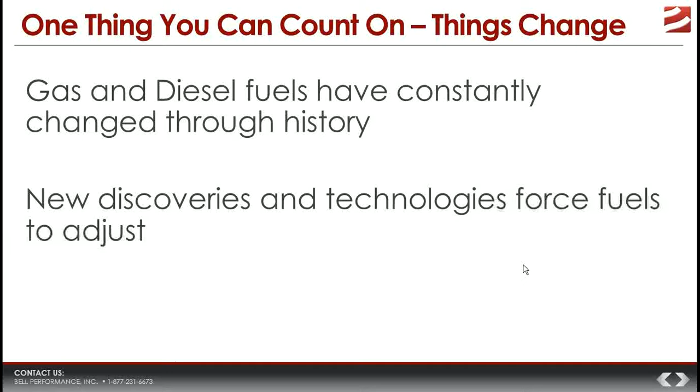Gas and diesel have changed markedly throughout the years, in response to the needs of the consumer and also the needs of the equipment that use those. Engines are completely different than they were in the late 19th, first half of the 20th century. Now you've got common rail diesel engines, gas engines with much higher compression ratios, and they've had to change the fuels in order to keep up with those and meet the needs of the consumers. So technology's changed, fuels have changed, the world itself has changed markedly, and that's one thing we're going to talk about in order to give some context into all of this.

Specifically, we're going to start by looking at the issue of energy in the world, the supply and the demand, and how that has changed from years past.

The biggest change, back probably about 10 years ago, there was a book written by Thomas Friedman called The World is Flat. It was a very interesting book, and the main thesis was that the world is changing markedly. People are a lot more connected, and the world's actually getting smaller because of the way we're able to connect with other people in ways we were never able to before. But one of the big things he talks about is the fact that the developing world is growing and consuming resources at a much faster rate than they used to.

An example of this is internet usage. Here in the United States and in Europe, we're used to thinking of the internet as our domain — we're the ones that use it, the third world doesn't tend to use it. That's what we think. But in the United States, we have about 270 million people that use the internet out of a population of 350 million. China has 650 million internet users. India has 352 million internet users — that's more people than in the entire United States. Yet we don't think of those developing countries as people who use that to any great extent, but they do.

Now look specifically at energy. We asked the question, who's using the energy? Well, in 2012, the International Energy Agency reported that for the first time in recorded history, oil consumption in developing countries actually surpassed developed countries. It was the first time in history that ever happened. If you go back to the year 2000, start of the 21st century, the developed world was using 70% of the energy. Now their demand has surpassed what the developed world is using.

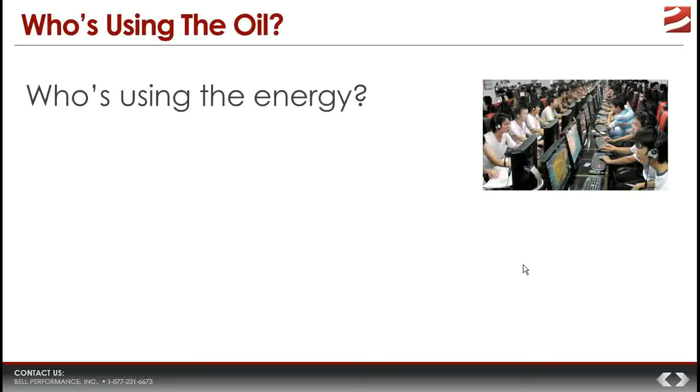The developing countries we're talking about are China and India, but also countries in Southeast Asia — countries that used to be considered third world, and by and large probably still are, but they have a growing population that is basically reaching out and trying to grab their share of the world's resources. And so when you have this demand that is growing and growing and growing, sometimes the ability to supply that demand struggles to keep up.

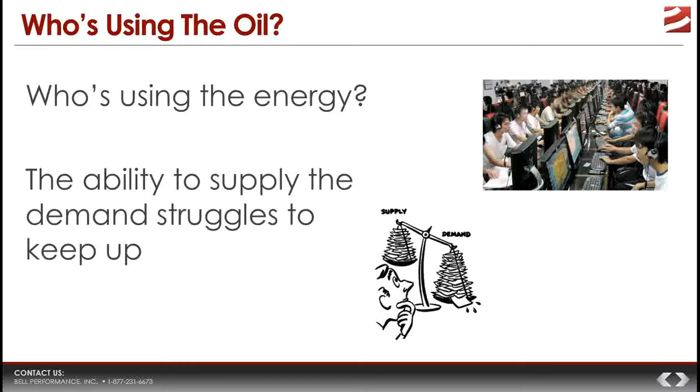And when we're talking about things like energy, crude oil, and fuel in that respect, what we're talking about is refining capacity — the ability to take crude oil and turn it into the things that people tend to use, gas and diesel. The refining capacity of the world has struggled to keep up with the demand.

Now, look at the United States. Go back to 1982, the United States had about 300 refineries that had the capacity to refine 17 million barrels of oil per day.

Fast forward about 30 years, 2013, the United States has 139 refineries, less than half, but they still have the same capacity, 17 million barrels a day. So you've got half the refineries refining the same amount of fuel, which means they're twice as efficient, but they're under twice as much pressure to keep producing, because if they stop, there's going to be problems. We've all seen what happens when a storm hits the southeast and knocks out a refinery in Louisiana. Gas prices shoot up because all of the refineries are working at a breakneck pace just to keep up with demand. So demand is something we're going to come back to later, because it's one of the drivers for this issue of how fuel has changed.

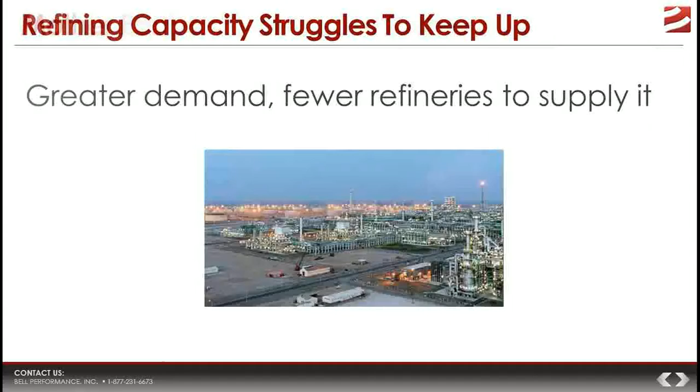Another key driver is the environmental movement. Whether you want to call it green consciousness, or being a friend of Mother Earth, whatever you want to call it, there's more and more people now concerned about the environment than ever before. And when the populace is concerned, Congress and the government tend to get involved. They are more likely to take action if the people are more concerned about it. So increased green consciousness has led to more congressional action, and that congressional action is what has impacted the fuels we use today.

One of the things we're going to mention again later is the Clean Air Act of 1990/1992. That is a key event that changed the fuels we use and caused some of the changes we're going to talk about, and what has brought us to our current situation.

So what we're going to do now is talk about some of the big changes that have happened in the fuels. We're going to talk about why those happened, and how those specifically changed things in the fuel that have caused specific problems you might be seeing now. So we're going to do a lot of contrast between looking at what fuels used to look like 20, 30, 40 years ago and what they look like now.

First thing we talk about is this thing called cracked fuels, or fuels made with cracked feedstocks. The first big change is that the storage life of fuel is completely different now than what it used to be. Back 20, 30, 40 years ago, the storage life of fuel was much longer.

There was a study commissioned by the U.S. Army in the 1960s. They wanted to study fuel storage life, and what they found is very interesting. They found that the expected storage life of regular gasoline should be 2 to 5 years without any problems. Expected storage life of regular on-road diesel fuel should be up to 10 years or more. That's what they found in the 1960s. So the old storage life was 2 to 5 years or more.

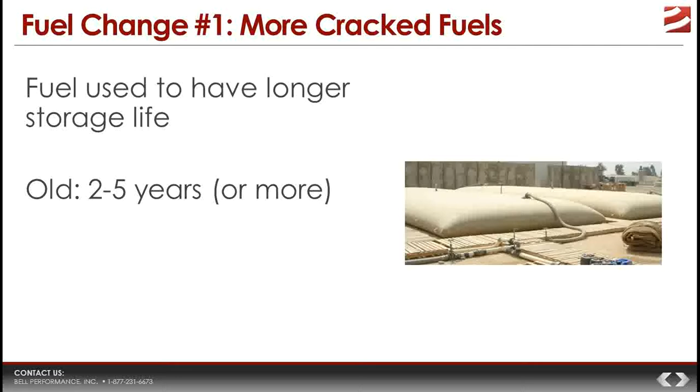What is the storage life like now? Well, not even close to what it used to be 20, 30 years ago. Now, storage life of gasoline, if it has any ethanol content, which virtually all on-road gasoline does, expected shelf life is 90 days. For diesel fuel, number 2 on-road diesel, you put it into storage for 1 year, and you can expect the storage quality to degrade about 25%. That can be anywhere up to 70, 80, 90% if you've got things like water or microbes in that fuel. So the big difference is storage life of fuel is way down compared to what it used to be.

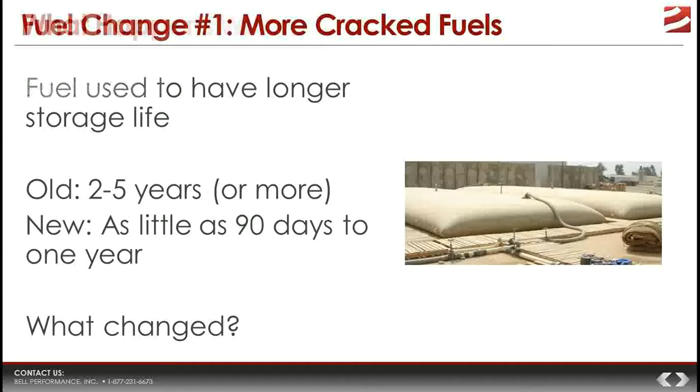What changed? That's the question. Why, what changed about it? Well, in order to answer that question, we have to cycle back to the supply and demand issue. Demand is at an all-time high. The ability to fill that demand has been struggling to keep up, and so you've got greater and greater pressure for the refining industry to get more gas and more diesel out of crude oil.

You can see this illustration here. A barrel of crude oil, which is 42 gallons, they tend to get a certain amount of the main components out of it. You see they take gas, they take diesel, jet fuel, they have heavy fuel oil, which is the residuals, the natural gas, and then the asphaltenes and the tars that are left over.

Now, what they want to do is, in order to meet this demand, they want to get as much gas and as much diesel out of that crude as possible. But there are limitations to what they're able to do. Right now, they're up to about 29 gallons out of every 42 gallons of crude oil becoming gasoline and diesel fuel. They would like it to be more than that.

And so what they have been able to do out of necessity, really, is petroleum chemists have developed what they call hydrocracking processes that they can use at the refinery to get even more gas and even more diesel out of that crude oil. Now, in order to understand this better, you have to understand basically what we're talking about when we talk about cracking. What is it all about and what do we mean by it?

Well, consider that crude oil, when it comes out of the ground, it's a natural blend of a variety of large and small size molecules. And those molecules are typically defined by the number of carbons that they have in them. Different sized molecules tend to be associated with different components. Gas and diesel fuels are made up of molecules that are between 8 and 21 carbons long.

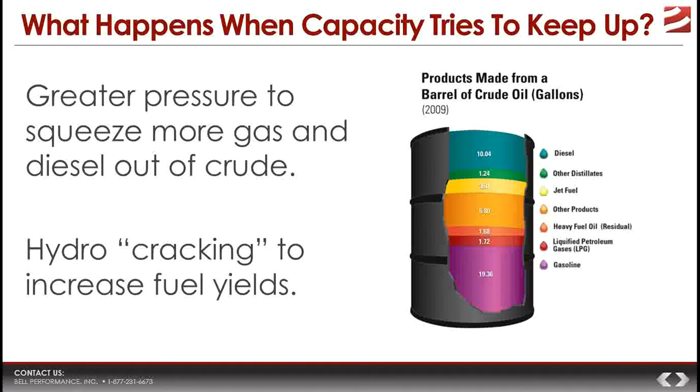And that's great. You know, that solves the problem to a certain extent, but it doesn't mean that there aren't consequences that happen when you do this. And the main consequence is that if you have a fuel that has a certain amount of what they call cracked feedstock, because they will blend that in, they'll use that as a filler. The more cracked feedstock a fuel has in it, the more likely it is to react and to degrade and to lose stability over a given period of time.

And the reason why is because when you take a long molecule, like in this illustration, and you break it apart into two smaller molecules, what you tend to get is those smaller molecules tend to have double bonds in them. They're what they call alkenes, if you're a chemist. And double bonds tend to be more reactive. They're less stable and they're more reactive than single bonds are.

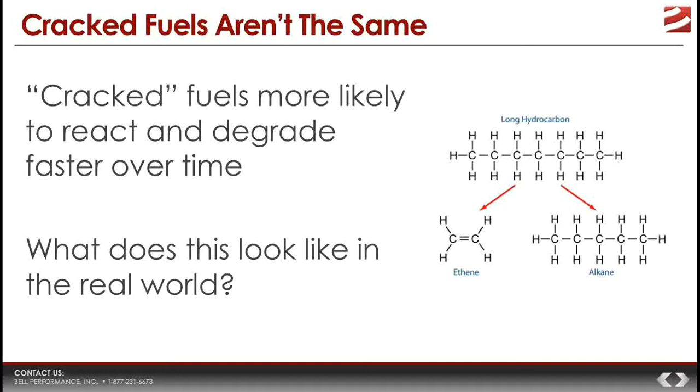What that means in practice is that those cracked molecules, now in the fuel, are going to go around, they're going to try to react with other molecules, and they're going to start catalyzing reactions in that fuel that are going to eventually cause it to become unstable and break apart at a faster rate than if they weren't there. So the consequences of this for where you're at in the real world is, as we said, poor storage life.

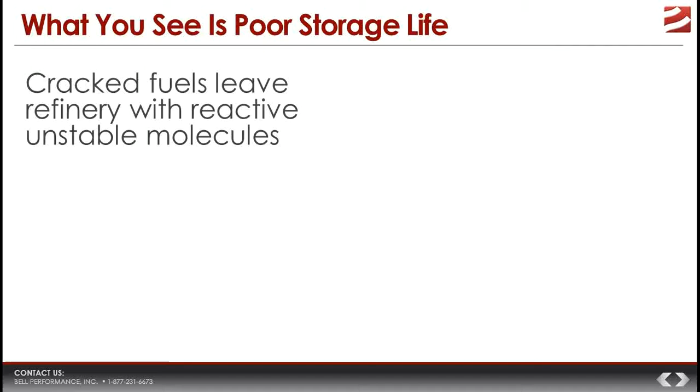Cracked fuels leave the refinery with greater numbers of unstable molecules, and these molecules are reacting, and when they react, they don't just react without consequences. What happens is that they tend to join and form longer and longer and bigger molecules as they react. And so what you start getting is formation of longer and longer polymers in the fuel, and eventually, given enough time, these molecules become big enough that they are too big to stay dissolved in the fuel. They start to drop out of solution.

And when that happens, you get color change in the fuel. The fuel starts to darken. Things like sludge and varnish and gums start to form, and those are the things that are going to be causing some of the problems that we're going to talk about.

What does this look like in the field? What that question means is, if you are a fuel user, where you're at, what problems is this going to cause for you where you're at? Well, to a certain extent, the problems are universal, but how you use the fuel, basically whether you are a fleet user for transportation or whether you use it in emergency backup generation, that is going to influence the problems that are going to most impact you where you're at.

So what does this look like in the field? Cracked fuel instability. Well, if you are a fleet operator or a driver, what you're going to get is the fuel's not going to burn as completely or as well as it would if it was fresh, and that's going to lower the MPGs you're going to get out of it. It's not going to burn as completely, which means more soot and more smoke production. You're going to get injector deposits, and you're also going to get shortened life and shorter service intervals for your DPF, your diesel particulate filter system.

All of these happen because the unstable fuel, because of the cracked molecules in it, is breaking apart. It's not burning cleanly. It's not burning completely in the engine. You're not getting the full energy value out of it. You're getting all of these problems. The big one to be concerned about if you're a fleet or a driver is the injector deposit issue.

Injector deposits happen because you're running fuel through them that already has sludge or gum or heavy polymer components dropping out of it. Those collect in the injector. They cook, they react with the heat and pressure already inherent in an injector tip, and you get deposits formed in that injector tip. The problem that causes for trucks is it affects the way the fuel atomizes. You don't get the best, most efficient functioning of that fuel injection system, and injector deposits are the single biggest influencer for mileage for any fuel-injected vehicle, apart from driver behavior.

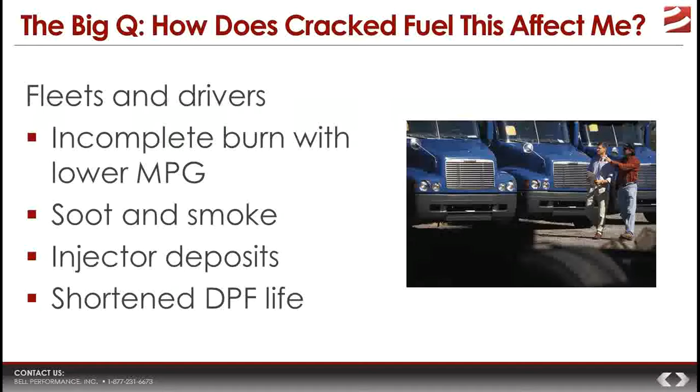So those are the ways that cracked fuel affects fleets and drivers. On the other side of the coin, you've got people who basically store the fuel and use it for generators and for emergencies. Those people are going to have similar problems, again, because it's reacting in the same way for them as it is for the fleet and the truck driver.

They're going to get sludge formation in the tank because that fuel is sitting there. All those heavy polymers forming, until that fuel is used, are just going to sit there. It's going to drop out and collect in the bottom of the tank. The reason this is a problem is because those molecules used to be part of the fuel, dissolved and soluble in it. Now they're not, and that means part of the energy value they would have contributed is not being contributed anymore. So the amount of work it can do, what we'd call MPGs, is not going to be as much as before. The system is not going to be as efficient because it's lost energy value.

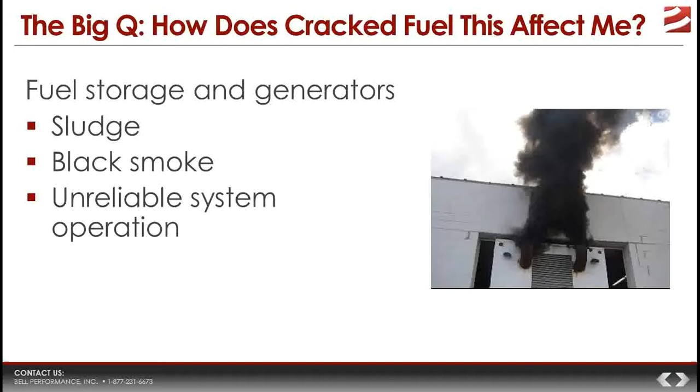Unreliable system operation is a big one for emergency systems, standby generators, and critical use systems. They store fuel in order for it to do a job, but if the fuel is unreliable and unstable, it's not going to burn as well, and that means a greater chance of that system not running like you need it to when you need it to.

So the bottom line for all this talk about cracked fuels: greater demand means more pressure on getting more gas and diesel out of a finite amount of oil, and that means the fuels being produced burn dirtier, burn less completely, and do not store anywhere near as well as they used to. That's the first big change: greater use of cracked fuel or cracked feedstocks in gas and diesel.

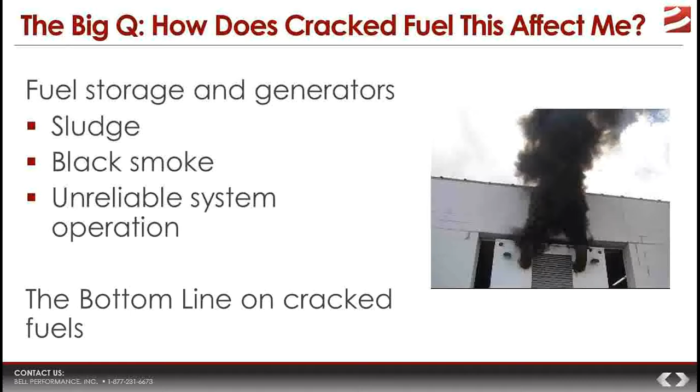The second big one is something everyone is probably familiar with by now: ultra-low sulfur diesel, or the marked reduction in sulfur content that diesel fuel today has compared to 15-20 years ago. Sulfur is a natural component of oil because crude oil is a natural product. So when you refine that oil, the sulfur ends up in the different components you take out of it. All fuels, except for really light ones like natural gas, all the distillate and residual fuels have some kind of sulfur content in them.

For most of the 20th century, regular on-road number 2 diesel had a sulfur content of 5,000 parts per million. But around 1990, Congress decided it was time to look at laws addressing environmental concerns: depletion of the ozone layer, toxic urban air pollution and smog, and acid rain was a big one, with pictures of forests full of dead trees. The public wanted something done about that. So Congress said sulfur emissions from things like diesel fuel are the primary driver of acid rain, and cut the amount of sulfur allowed in diesel fuel. This was done at the refinery level.

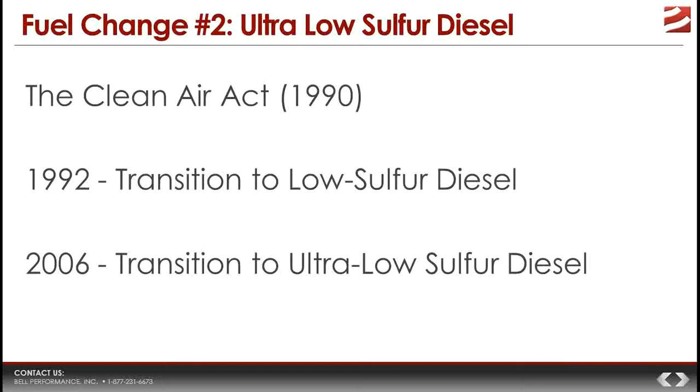Now, what effect did this have on the fuel itself? There are about 5 main effects we're going to talk about. The first is the effect on fuel lubrication, the lubricity value of the fuel. Generally, sulfur content in fuel has been associated with the ability of that fuel to lubricate things like injectors and fuel pumps. Injectors and fuel pumps have relied on the fuel's lubricity value to lubricate them and keep them from wearing out prematurely. Now, when you remove sulfur, you lower the fuel's ability to do this.

This increases wear on these parts—fuel injectors and fuel pumps—specifically causing premature wear on parts and shortened part life. And of course, it stands to reason that you're going to get higher maintenance costs as part of that.

First problem, reduced fuel lubrication because they took the sulfur out. Consequence of that: increased maintenance costs and wearing out of injectors, things like that.

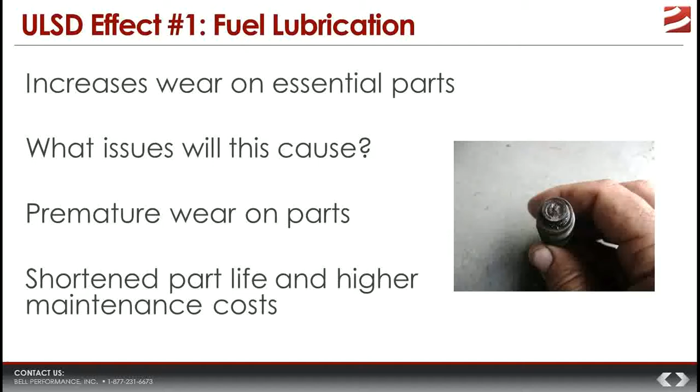Second main problem is lower energy content. When they process the fuel, they not only remove the sulfur, but they also remove other things like aromatics, which are a type of molecule that make up a significant portion of the diesel fuel. Removing those changes the energy value of the fuel, lowers it, about a 1% reduction. Anytime you have a lower energy value, that lowers the MPGs for the consumer, for the user, and it basically makes it more expensive.

So how much more expensive? A 1% reduction in energy value doesn't sound like a whole lot. When they were running the numbers, they were estimating that for every 100,000 miles you drive, your costs are going to go up about $500. Now for the average consumer with a diesel pickup truck, that's pocket change, they can find that change in their sofa. But for a fleet with hundreds of vehicles running on diesel, that cost adds up, and that's an extra cost that could be used in another area. So it's significant for them.

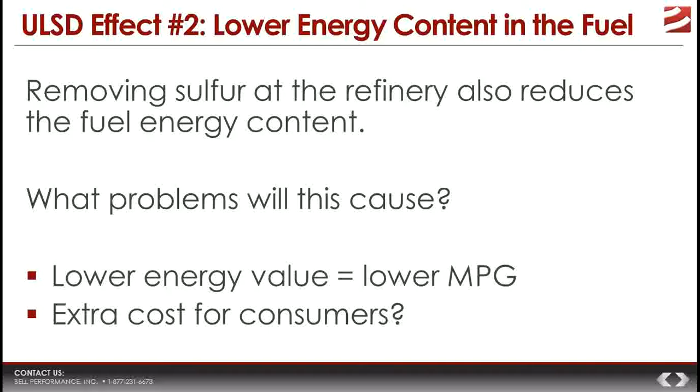Also, a factor that plays into the cost of ultra-low sulfur is that it's more expensive to produce. They estimated it was going to add between 5 and 25 cents per gallon to that diesel fuel. So you're getting a little bit less mileage, but it's also a built-in cost on the front end that is costing users more. So the second effect of ultra-low sulfur diesel: it's more expensive, basically.

Third effect: contamination, or possible contamination, with high sulfur diesel fuel.

If you think about it, think about all the storage tanks around the country. A lot of those storage tanks are older ones that used to have high sulfur and low sulfur diesel in them. When they started transitioning over to ultra-low sulfur diesel, some of those might have been drained and filled with ultra-low sulfur diesel. If you were to go and test all of those tanks, what you would likely find is that a significant number of them have sulfur content that is too high, out of compliance. And the reason for this is that it does not take very much leftover high sulfur fuel in the bottom of that tank to bring the whole mix out of compliance.

To a certain extent it's a mathematical issue. Let's say you have a 1,000-gallon tank that used to be filled with low sulfur diesel, 500 parts per million. They wanted to switch it over to ultra-low sulfur, so they drained it. But let's say it had some sludge left in the bottom, and they drained it down, but might have left some of that sludge in there. Then they filled it up with ultra-low sulfur diesel. Sludge tends to act a little bit like a sponge, so there were trace residuals of this higher sulfur diesel fuel left in there. In a 1,000-gallon tank, all you need is 15, 20 gallons of leftover trace high-sulfur diesel to throw the whole thing out of compliance.

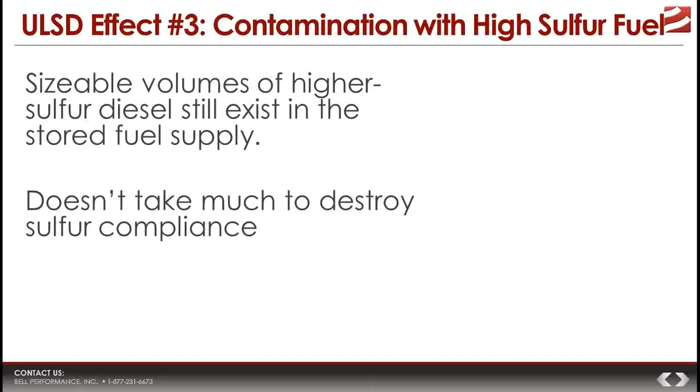So there's a lot of tanks out there that are out of compliance. Now, in and of itself, who cares? Why are we even talking about this? To a certain extent, contamination with high sulfur diesel is not a performance issue. It's not going to destroy equipment by and large. It's not going to cause engine problems.

What this becomes is a compliance issue and a legal issue, because when they switched over to ultra-low sulfur diesel, the EPA, which tends to enforce this, announced penalties. If you were a truck driver and had your fuel tested and it was found to be out of compliance, you were faced with penalties of $32,500 per tank per day. And they would backdate that, assuming you had been using this fuel for 21 days, 28 days. Naturally, when you're looking at six-figure fines potentially, the industry said, whoa, that's a problem.

The EPA worked with them and allowed a slower implementation of the ultra-low sulfur diesel, but that implementation period, designed to try and get this higher sulfur fuel out of the system, is over with. So this effect of possible contamination with high sulfur diesel is a legal liability issue that people who manage fuel have to be concerned with.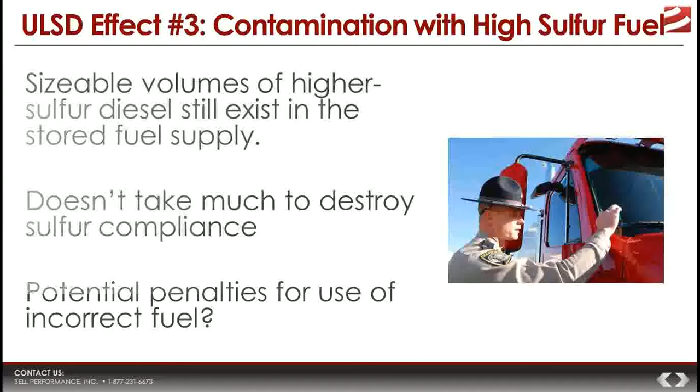Fourth effect: cold flow properties. Bell Performance is located in Florida, so we don't tend to have cold flow problems down here, but we deal with a lot of customers and fleets up north. If you're up north in Michigan, Illinois, New York, anywhere above the Mason-Dixon line, you know diesel fuel has cold flow issues in the winter.

Diesel fuel naturally contains paraffin wax components. Those are normally dissolved and burned seamlessly as part of the fuel, but when the fuel starts cooling down, some of those start to drop out of solution. They form crystals in the fuel, those crystals bump into each other and get bigger. Over time, as the fuel continues to cool, more and more wax comes out, and eventually the fuel thickens. You get enough wax that it plugs the filter, and when the fuel filter is plugged, the engine shuts down because there's no fuel flow anymore.

Now, ultra-low sulfur diesel has issues with this because of the processing. When they removed sulfur, they also removed and destroyed some compounds, like the aromatic compounds that in the old fuel would act as dispersants, keeping wax crystals apart if they came out of solution. Now those compounds aren't in there anymore, so there's nothing to keep the fuel from gelling at a higher temperature, and that's exactly what happens.

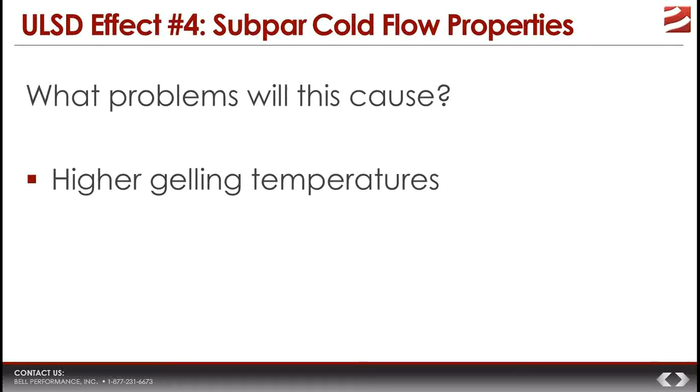So what problems does this cause? The fuel gels at a higher temperature, which means you have more gelling problems in a given winter period. So you get increased filter blocking and operability issues, and if you're a business running trucks out there, any potential for operability issues means potential for lost business and big-time headaches. The big difference between how ultra-low sulfur diesel behaves in the field versus the old fuels is that it's much more sensitive to cold weather problems.

The fifth and last effect we'll talk about is lack of resistance to microbes. This is probably the biggest one, with the potential to affect the most people in the most serious way. Regardless of whatever kind of fuel you're putting in a storage tank, microbial presence in those storage tanks is a universal problem faced by everyone who has a fuel tank. That's because microbes are ubiquitous in the environment around us. We already know that—they get into the tank by any number of ways.

It's not like somebody's taking a petri dish and dumping the contents into a tank. All that needs to happen is dust comes in—you can have hundreds of millions of microbes on a single particle of dust. Water gets in, whether by a tank leak or just water vapor in the air. If you get a fuel drop, somebody drops some fuel, they've got microbes in their tank, and it spreads very easily from tank to tank.

So they get into the tank, and what they're looking for is some kind of water layer. Anytime you have water in the tank, you have a layer of water on the bottom and fuel on top, and those microbes are going to settle into the interface where the two layers meet. They draw what they need from both sides, and they grow, thrive, multiply, and produce biomass and all sorts of stuff that causes problems.

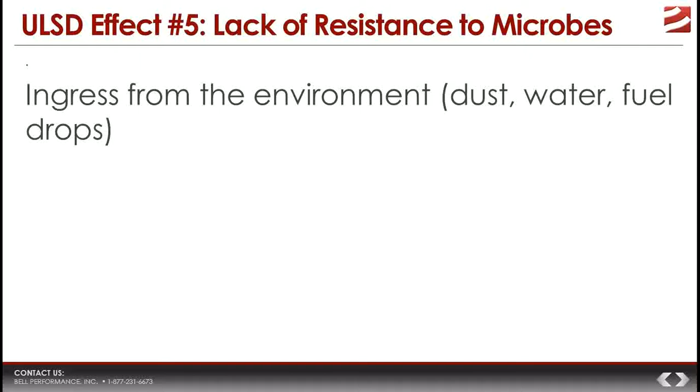We mention water because anyone that has a free water layer in their fuel storage tank has the very real possibility of having a microbial growth problem. It is not a matter of if, it is a matter of when—seriously, for those types of situations, it's not a matter of if, it's a matter of when.

But most people don't seek to have a water layer. So how does water build up in a tank? Well, it can happen just by natural processes—even something as simple as condensation.

Fuel gets a 7-degree temperature difference between daytime, and then when it cools down at night, temperature drops. Any water vapor that's in the tank from air that has exchanged through airflow is going to condense on the sides of the tank. It's going to roll down to the bottom because water is heavier than fuel, and there's going to build up a water layer over time. This is probably elementary stuff to those of you who have dealt with tanks in any significant capacity. That's just the way it is.

But even beyond condensation, you could have someone transfer water during a fuel drop. If you've seen gas stations with underground tanks, they have openings and spill buckets designed to catch water, and those can hold two, three, four, five gallons of water. Somebody goes to do a fuel drop and isn't paying attention, and some of that water goes into the tank. There are enough ways for water to get into tanks that it's virtually inevitable that a storage tank is going to build up water.

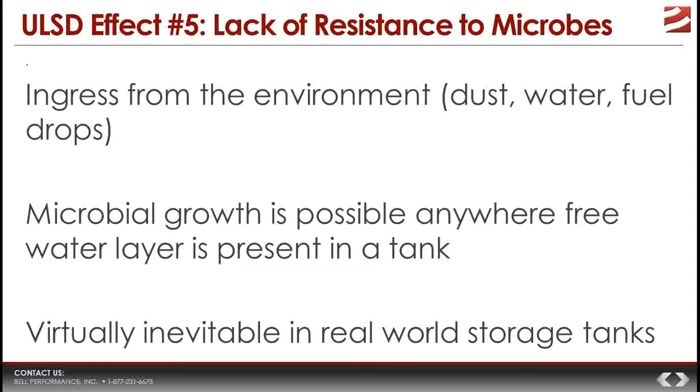So microbial problems are a potentially big issue. What problems do they cause? Now this is kind of the so-what part. What problems do they cause?

Well, the first thing is that fuel microbes are associated with filter plugging, and they're very easy to spread to other areas. They produce biomass and slime because of the natural processes and byproducts of their activity. That biomass clings to the sides of the tank and gets into the filters, plugging them. That's why if you manage any amount of tanks, you tend to know how often you have to change those tank filters. When you notice that frequency shortening or changing suddenly, that is a surefire sign that something's going on in that tank that you need to check out.

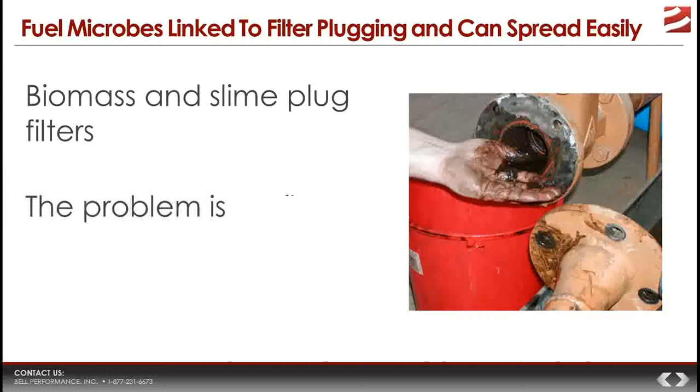And just like infections in the human body, infections in fuel tanks can be very easily spread anywhere that fuel goes. I mean, it's just the way it is.

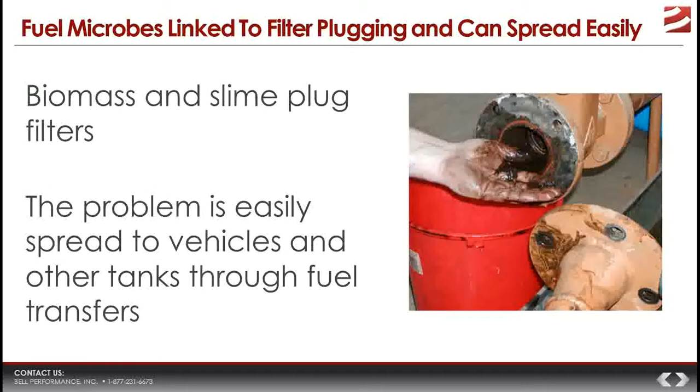Second problem is that microbes tend to destroy fuel stability, and if you add microbes to fuels that have cracked stocks, you get a double effect. Microbes, when they grow, produce acids and biological byproducts, and those will attack the fuel and break down the fuel quality.

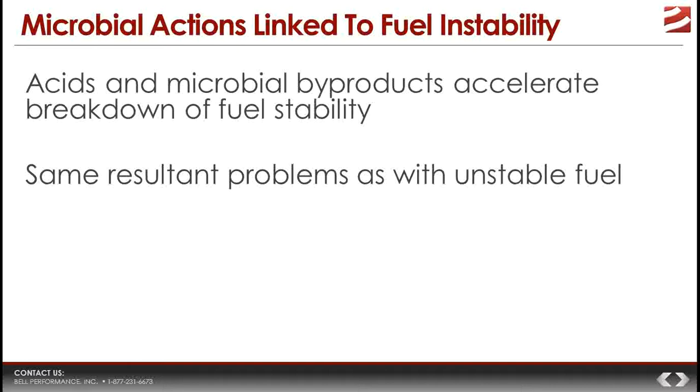What problems does this cause? Well, you get the exact same problems as we talked about with fuel instability: deposits in the engine, black smoke and emissions, rough, inefficient engine operation. All of the problems associated with unstable fuel are going to be associated here as well.

Consider places that store fuel for emergency use, like hospitals, telecommunications businesses, public utilities—places that have to keep going and cannot have their systems shut down. So they have backup systems with stored fuel.

Now, the nature of stored fuel, or emergency use fuel, is that those tend not to be checked very often. The fuel is there because they might need it at some point, but they don't know when they're going to need it. They just know that when they need it, it has to do what they needed it to do. It absolutely must. So there's a very, very high value placed on that stored fuel performing properly when it's called on to do so.

Now, as we have implied, the nature of emergency means they don't know when that fuel is going to be needed. And so because of human nature, unless there is a rule in place that says you must check your tank every month, test the fuel, do whatever, X number of times within a year—unless there's something directing people specifically to do it, people tend to leave that alone because it's out of sight, out of mind. And so what you get is problems that arise when emergencies happen and the fuel in that tank hasn't been checked. You get a higher chance of what we'll call critical system failures.

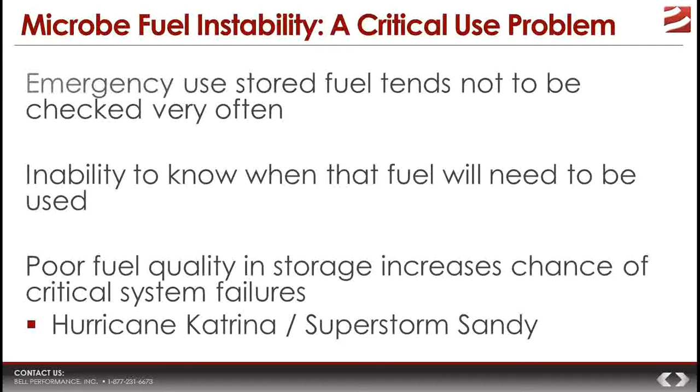And the biggest culprit in those situations is microbial buildup in those storage tanks. Now, microbes cause instability, they cause filter plugging. What they also cause is what they call microbe-related corrosion. Within the industry, it's abbreviated as MIC, microbially induced corrosion. We mentioned earlier that microbes, as a natural part of their biological processes, produce acidic compounds. And those acidic compounds do exactly what you think they do - they attack storage tank surfaces, and start to corrode surfaces and components inside of that tank.

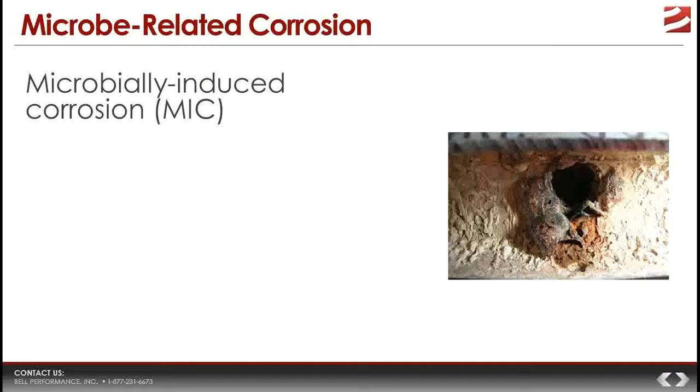There are cases where some types of bacteria have been known to eat through a 5 millimeter thickness of 316 grade steel in 1 to 2 months. Now that is an extreme case, but it is a documented case. And it basically serves to illustrate the kind of serious damage that these microbes can cause.

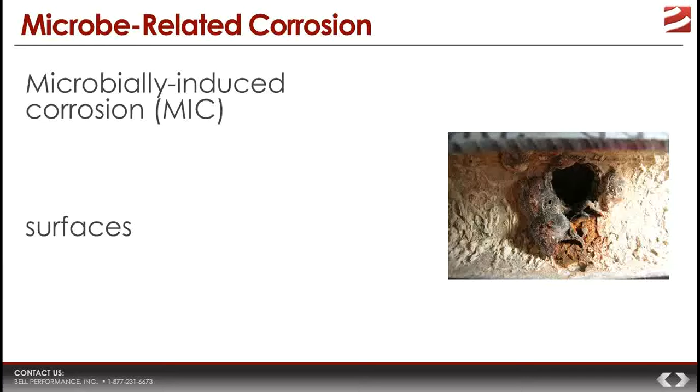And this kind of damage is expensive. Anyone who deals with tanks knows that even if you have to replace parts inside of them, it's at least hundreds, if not thousands of dollars. And it's not something that is a budgeted, expected expense either.

Now, how did the changes to ultra-low sulfur diesel lead to microbe problems? Okay, well there are two inherent qualities of ultra-low sulfur diesel that have caused it to be more susceptible to these issues. The first one is that it is more what we call hygroscopic, meaning that it attracts water.

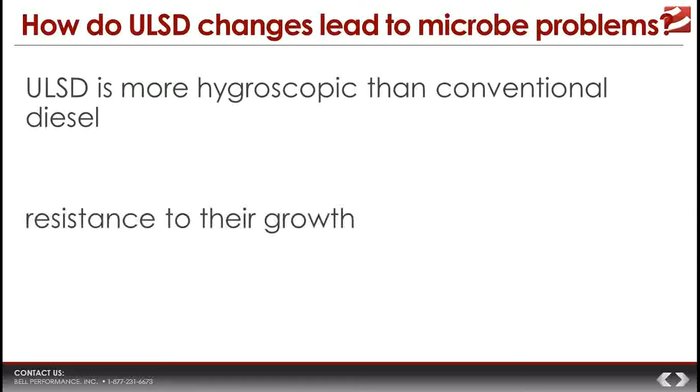Sulfur was a natural biocide that tended to inhibit microbial growth. Microbes do not like being around high sulfur content. That is why, when you had high sulfur and low sulfur diesel fuel, the conventional wisdom was that as long as you kept the water under control, you would not have to worry about microbial growth in those fuels. Now you take the sulfur out, and there is virtually nothing in that fuel that's going to keep these microbes from growing and thriving in them. And so that is why, if you have ultra-low sulfur diesel in a stored fuel tank, microbial problems have the potential to be a huge problem.

Okay, now let's cycle back for a moment to those old storage tanks, the ones that have had fuel in them for years and years. Go back to the last time we had a major hurricane, a really active hurricane season - that was around 2003, 2004, 2005. When hurricanes are coming, checking the backup fuel in the tanks tends to become more urgent than when imminent danger is not imminent. So a lot of those tanks had fuel added to them back then.

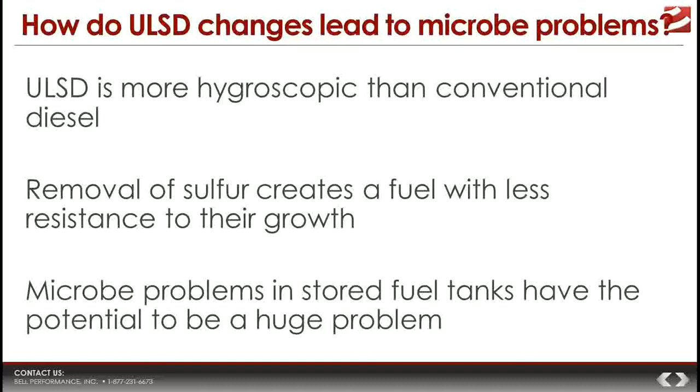So what we want to do in this last part of the webinar—we spent a lot of time talking about the problems and why, all the little details about what led up to those issues and the problems they cause. So what we want to wrap up with is action: what do you do about these? These are the kinds of solutions the industry has figured out for these problems. We'll spend a few minutes going over these briefly, then take some questions at the end and wrap up.

So first problem, remember we talked about fuel instability. The problem was heavy fuel components, deposits and sludge in storage tanks and in engines. The cause being refinery cracking methods, and also the action of microbes in the fuel. Anybody who uses stored diesel is potentially affected by this issue.

The recommended measure is that you have to treat the fuel when it is fresh, with a stability treatment. There are a number of options out there that are effective—some are better than others. If you're looking for a stability treatment, what you need is actually a package of things, not one thing. It's actually 3 or 4 main things.

It has to have an antioxidant in it, which stops the oxidation reactions, those chain reactions. It has to have a dispersant that will keep sludge particles dispersed in the fuel and keep them from agglomerating and polymerizing. It also helps if it has something called a metal deactivator—certain metals like copper tend to be great catalysts for making fuel go bad, so a metal deactivator will neutralize that metallic exposure. And lastly...

All of the good stability treatments on the market are designed to be cost effective by having low treat rates, at least 1 to 2,000, if not 1 to 3,000 or more. So if something claims to be a stabilizer and wants you to add it at 1 to 1,000, you probably don't have one of the better ones. And like we said, the absolute number one thing you have to do is add it at the beginning, before the reactions start taking place—these treatments stop reactions, but they will not reverse them.

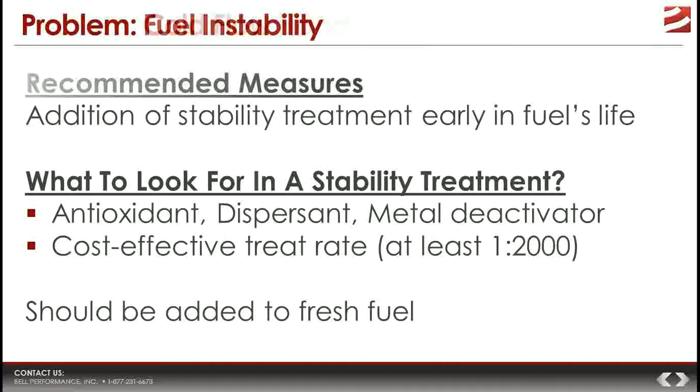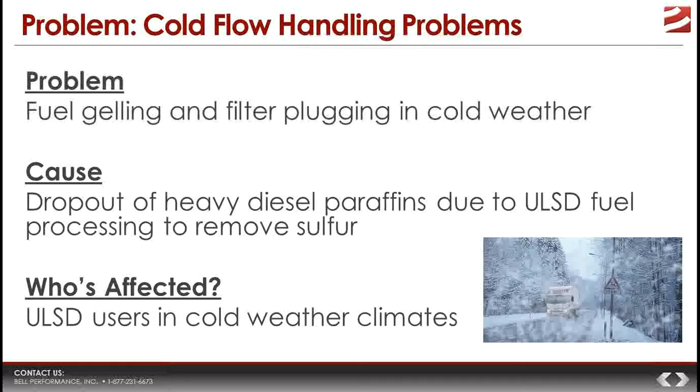Second problem we talked about: cold flow handling problems, caused by fuel gelling—paraffin wax dropping out because the fuel gets cold. Anyone in a cold weather climate, any diesel user, has the potential to be affected by this. The recommended measure, similar to stabilizers, is that the only thing you can do is treat the fuel with a cold flow treatment, and you have to do it before the fuel gets cold.

Fuel management professionals will know that their fuel tends to cloud up at a certain temperature. It's recommended to add a cold flow treatment before that happens. These treatments work by keeping the wax crystals small and away from each other, which keeps the fuel from gelling. Add it to the fuel above the cloud point, which for most fuels is between 20 and 30 degrees Fahrenheit—that's basically how you do it.

Last thing to say about this—we've mentioned engine designs. Common rail diesel engines are pretty much the standard now, and they have smaller filters. They're higher pieces of technology, and they spec smaller fuel filters because they want to keep absolutely everything out of that engine. Now, while that's good for the engine, unfortunately for fuel gelling that actually exacerbates the problem, because the fuel filters plug more easily with smaller amounts of wax.

So the recommendation for treating fuel for gelling is: if you thought you didn't have to worry about it until the temperature got to 25 or 30 degrees, now they're saying add 10 degrees to that and start worrying about it at 35 degrees. So that's an area where the change in engine technology is forcing human behavior to adapt to it, if you don't want to have problems.

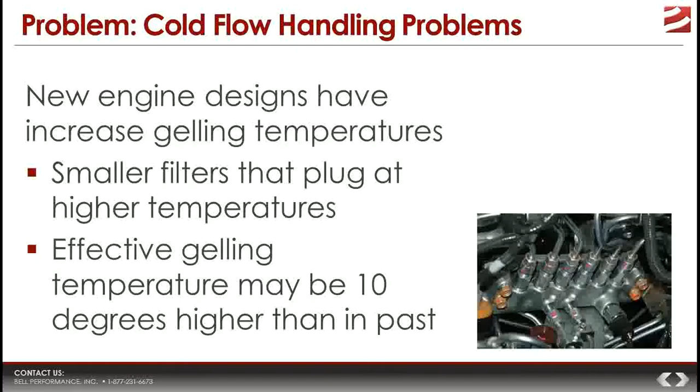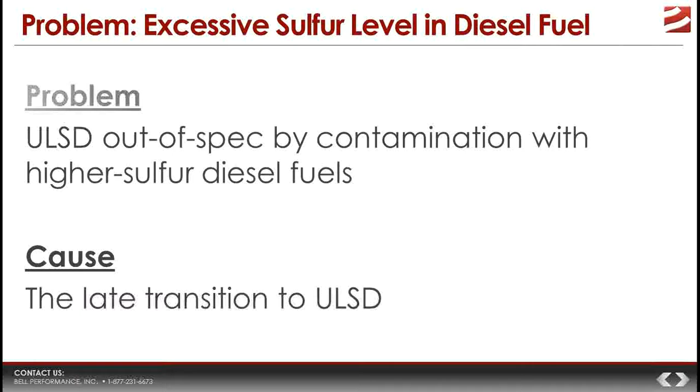Excessive sulfur level in diesel, again, we talked about that this was basically not a performance issue, it was a liability issue. The only way you can get around that is basically to dilute the fuel. Use the fuel if you can, but keep adding more ultra-low sulfur diesel until that fuel sulfur level is diluted enough.

The reason we bring this up is because we've been asked about fuel polishers. There are a lot of fuel polishers out there, and some of them, in the effort to differentiate themselves from the competition, make certain claims like, if you have fuel with too high sulfur content, they can polish that sulfur out. Well, it does not work that way. There's nothing a fuel polisher can do through a mechanical process that will reduce sulfur level if it's too high. The only thing you can really do is dilute the fuel or, unfortunately, get rid of it. That's really the only thing you can do.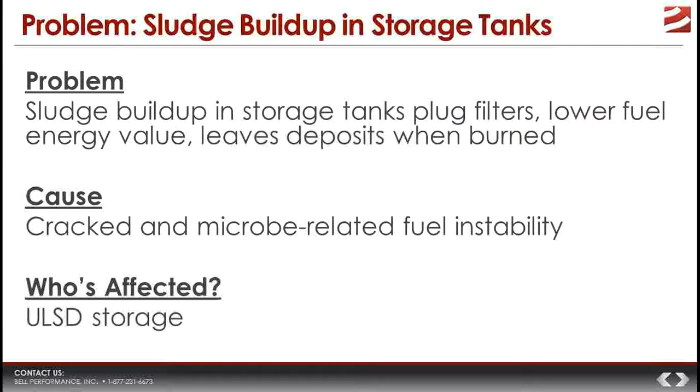Sludge buildup in storage tanks, again, related to the whole issue of fuel instability. So the way to solve sludge buildup is you use a stabilizer to keep that sludge from forming, and you use antimicrobial biocides to keep microbes from destroying that fuel quality and accelerating the formation of sludge in those tanks.

And then the last big one we talked about earlier, the whole issue of fuel and tank microbes. They cause a myriad of problems. Anytime you have water in the tank, you get the possibility of them establishing themselves there. Anyone who stores fuel, especially if you don't monitor it regularly, has the very real possibility of being affected by the problems associated with them.

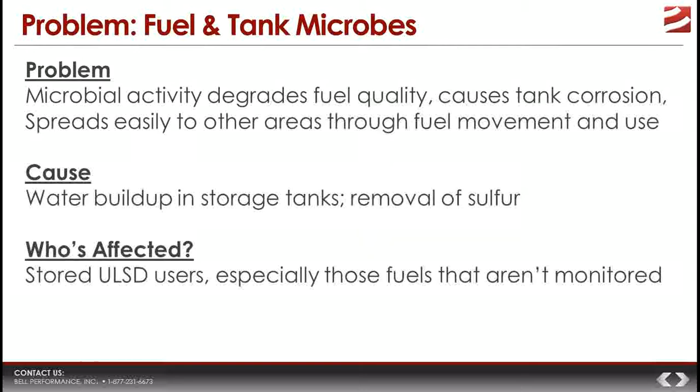Now, the recommended measures for dealing with fuel and tank microbes typically get divided into two main categories: housekeeping measures, and measures designed to deal with an existing problem. Housekeeping measures are things you do to prevent them from growing in the tank, and the biggest one is staying on top of the free water buildup as regularly as possible. But if microbes do establish themselves in there, housekeeping measures won't do anything for that. The only thing you can do then is treat the fuel in the tank with a biocide.

Biocides are the only thing that will kill microbes. You can get rid of the water, you can even use things that claim to absorb or control water, but if you have living microbes in that tank, those water controllers will not get rid of those problems. That is one of the biggest misconceptions in the industry, that all you have to do is control the water and you'll get rid of the microbes. That is absolutely not true.

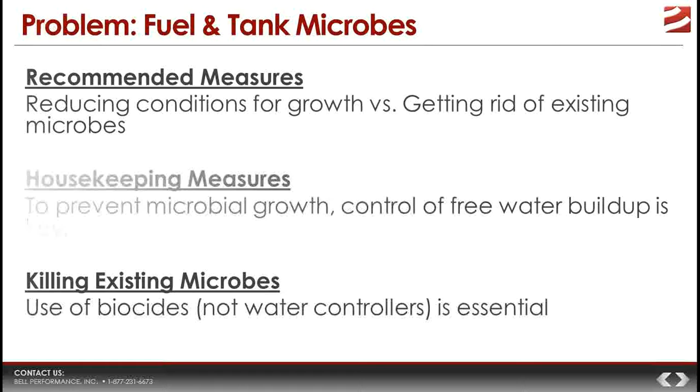If you have an existing microbe problem, you have to use a biocide. There are a lot of different biocides out there, and we're finishing up with this because it's something very important for people who store, process, and use fuel, but something a lot of them don't know much about. There are different chemistry options, and there are things that claim to control microbes by controlling water that aren't really biocides. Unless you know specific things, how are you to know which one is the right choice? Well, there are certain hallmarks or characteristics you want to look for when choosing a good biocide to solve your problem. It should incorporate the following characteristics.

What do we call broad spectrum? That basically means it has the ability to kill as many of the main kinds of microbes, bacteria, fungus, and mold, that are typically found in a tank. It should kill the whole spectrum of them. Fast acting.

Typically, if your biocide is properly applied, it kills everything within an hour to 1-2 hours, and that's generally what you're looking for. There are ones that are faster than that. If it's more than 2 hours, you may want to consider looking at something else.

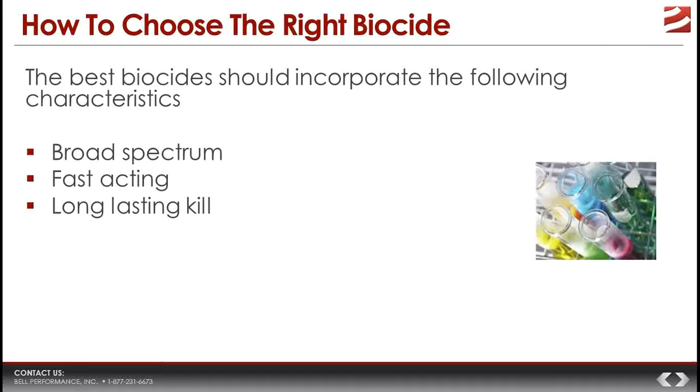Long-lasting kill, that's the big one. You want the biocide to keep working and be effective for as long a period of time as possible. Now, remember, biocides are not a one treatment and last forever type of thing. The most you will generally expect reasonably to get out of a biocide treatment is about 4 to 5 weeks, but a lot of them are shorter than that. Some only last 1 week, maybe 2. So if you can have one that lasts 4, 5, maybe 6 weeks, you're getting the better ones, best ones in the industry.

But also, if you want to keep microbial problems out of the tank, you need to keep checking, and you need to plan to reapply maintenance doses of biocides, ideally once a quarter. Twice a year would be good. Quarterly would be better.

This is another important one: dual phase effectiveness. You're going to have water and fuel. They recommend if you've got an infected tank that you remove as much water as possible. But if there's any water left, you want that biocide to work both in the fuel, and then migrate down and partition into the water, or move into the water. When it does this, it moves across that interface, which, if you remember, is where a lot of the microbes do their best activity. So that biocide moves across the interface and does the best job of killing.

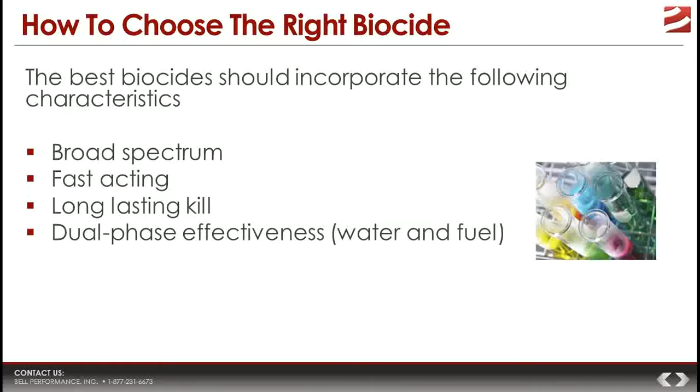We haven't mentioned many specific products here, but the big one with respect to dual phase effectiveness, and not being effective, is BioBor. It's the most well-known one in the industry because it's been around the longest, but it actually has the poorest effectiveness for a biocide, and if it comes in contact with water, it actually crystallizes and stops working.

Last one: registration with the EPA. This is a key way to know if you've got a good biocide or not. An actual legitimate biocide, not some potion some joker whipped up in his garage and is trying to sell on the street, but an actual good biocide with effective chemistry, those are required to be registered with the EPA, and they're required to have their registration numbers printed on the labels. So if you want to know if your biocide, or something claiming to be a biocide, is legit, look for the registration numbers. We say numbers because there are two of them. If it has them and they're easy to find, you're good to go. If it doesn't, then maybe you need to reconsider the one you're using.

And the last thing: sometimes tanks will get, remember we said microbes produce biomass, and sometimes that biomass, which is a sticky, kind of nasty matrix of biological material, will cling and settle on surfaces, and microbes will actually hide behind that. You put a biocide into the tank, those microbes are shielded from the biocide, and then when the biocide's been used up, they come back out to play and reinfect the tank.

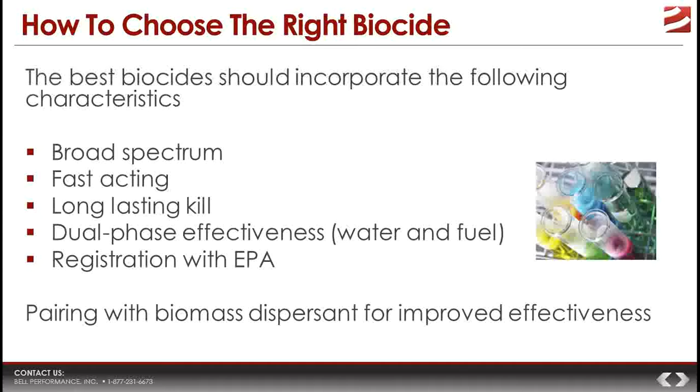If you know you've got biomass in that tank, there are dispersants you may want to pair with that biocide that will bust up that biomass, essentially poke holes in that shield, and make the biocide you're using even more effective. And the last thing we'll mention: proper application for biocides is absolutely key. You want to remove as much of the water as possible to start with.

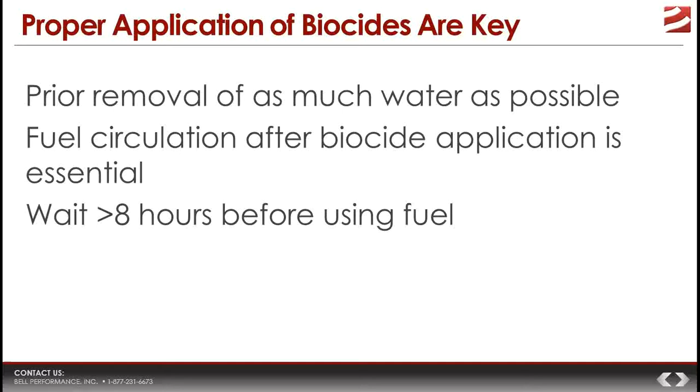You add the biocide, and then you need to circulate the fuel for a given amount of time to allow that biocide in the fuel to contact the microbes and kill them. Then when you're done, you need to wait about 8 hours to allow the dead microbial bodies to settle down to the bottom of the tank, because biocides kill them, but they don't make them disappear. Now they're all dead, and if they run through the filter, they're going to plug that filter, which isn't a bad thing, it's just the way it is. So wait 8 hours before using the fuel, and keep extra filters on hand, most definitely, as those bodies get caught by the filters.